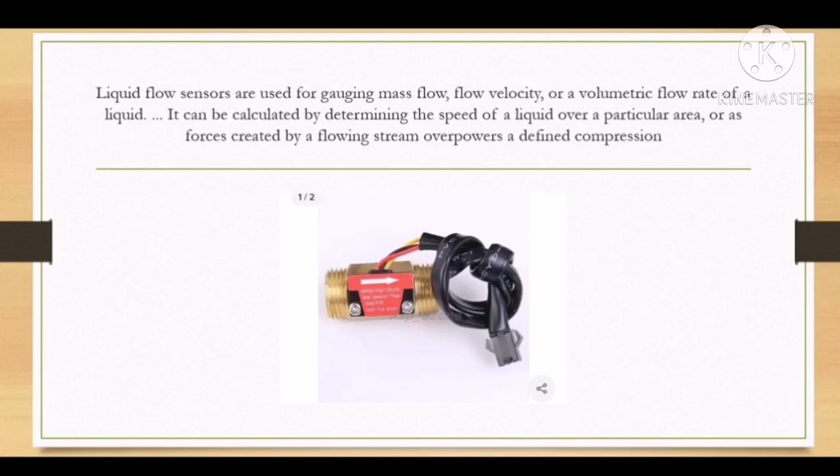This is called the serial port. For example, if you connect the Arduino with a computer, this VISA block shows the port COM, for example COM3, COM4, COM5. The velocity is 9600, which is the velocity of the Arduino.

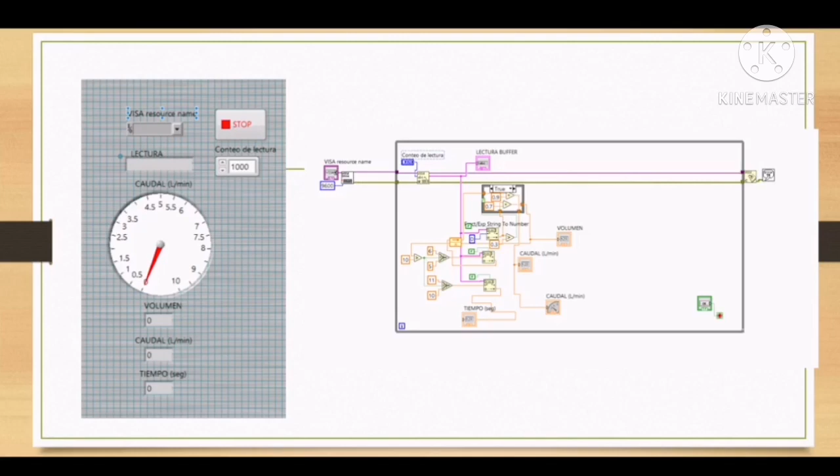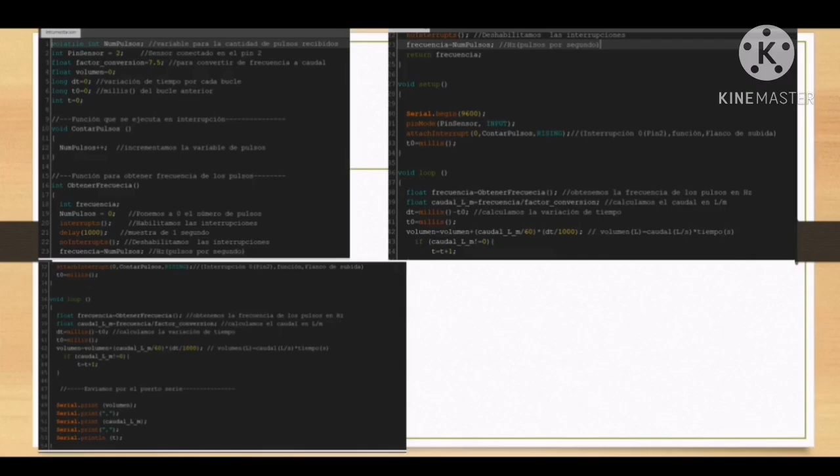Good night, my name is Iram Delgado and I am going to talk about measuring revolutions per minute. The company that designed the spraying machine used a Hall sensor as an indicator of the impeller speed. The model is A3144 and a neodymium magnet, which is very strong.

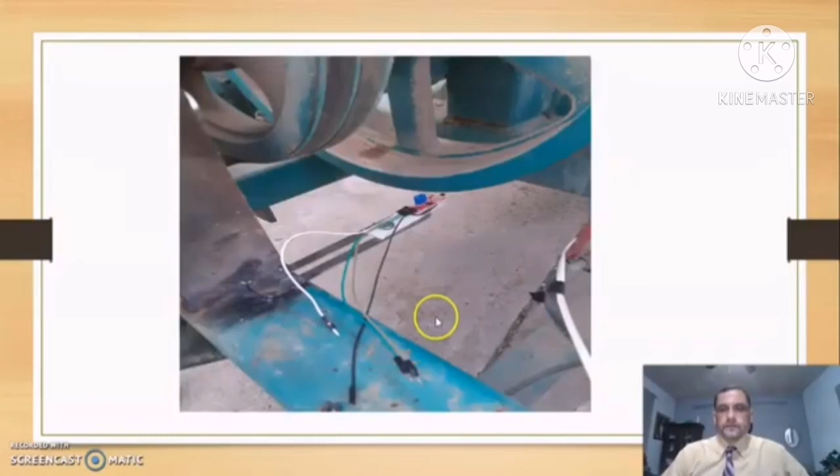The signal is obtained through a Hall type sensor, and this sensor obtains the signal from the neodymium magnet. That sensor registers the turns by means of electric impulses. In this way, we obtain pulses for each turn of the rope. We count those pulses to get the revolutions per minute.

We wrote the code in Arduino. In the part for revolutions, we declare the variable count, and the impulse increments it by one. The data is printed and sent to LabVIEW through the serial port, and there in LabVIEW we show the revolutions per minute on an indicator.

Camargo is a nut producing region. Thanks to the project, we generate benefit for the farmers who have and work the walnuts. The Technology University of Camargo has one of the most specialized careers for innovation, which is the career in mechatronics. This project consists of following up on an existing project, innovating and improving the machine with the use of technology, reducing costs and personnel work.

The company Agroindustrial San Luis gave us the opportunity to work with the project. This company manufactures agricultural machines for the field. In addition, this company supports us economically and in service, lending us a place of work and the necessary material. For this project, it took us approximately 4 months.

Interacting and working in the company workshop with the help of some teachers and company staff. Teamwork is very important for the manufacture of this project, since collaboration is needed for several tasks, in addition to having the responsibility to fulfill.

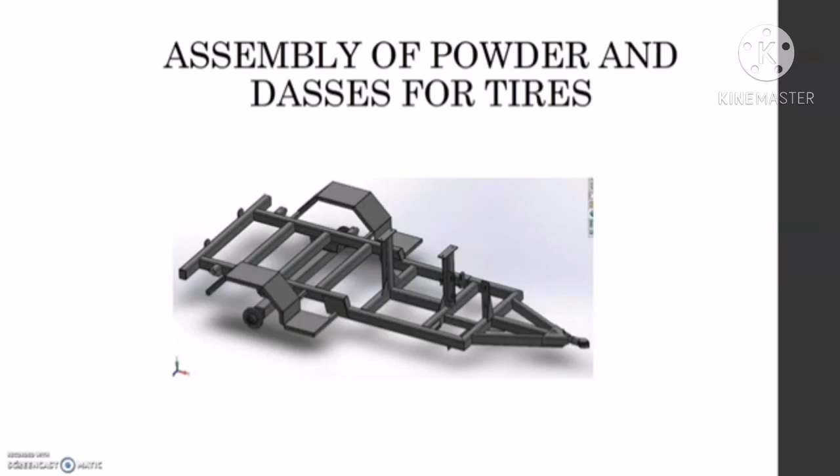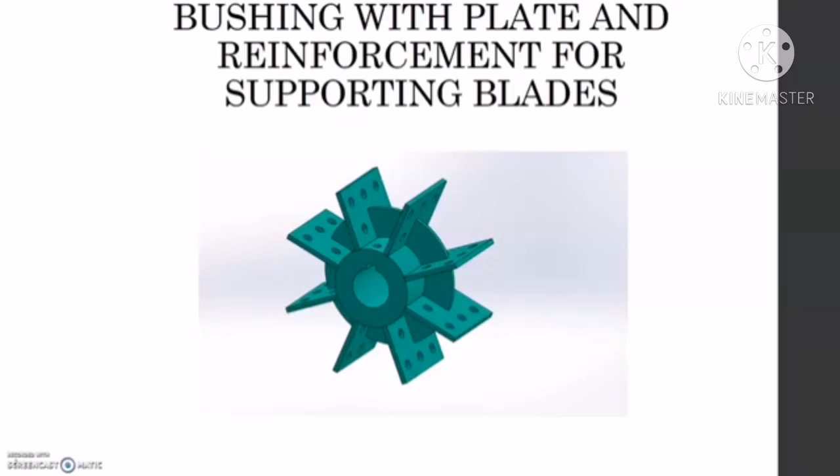This is the impeller bracket, machine weights, plate reinforced for supporting blades, and the aluminum impeller assembly to reduce weight and increase speed.

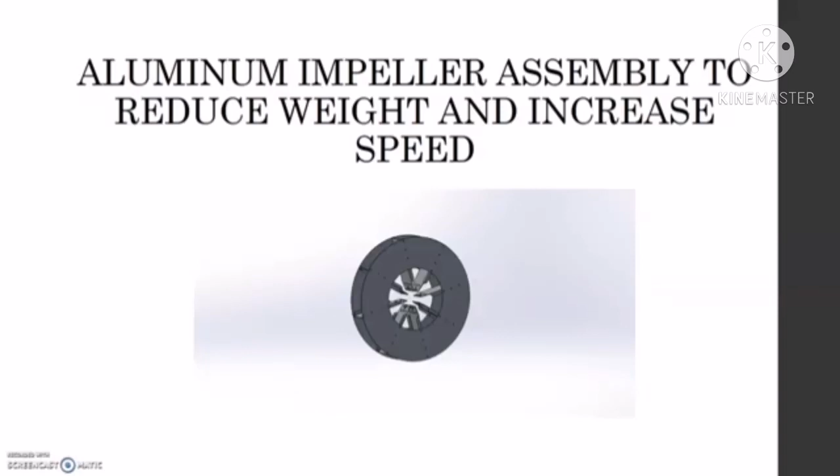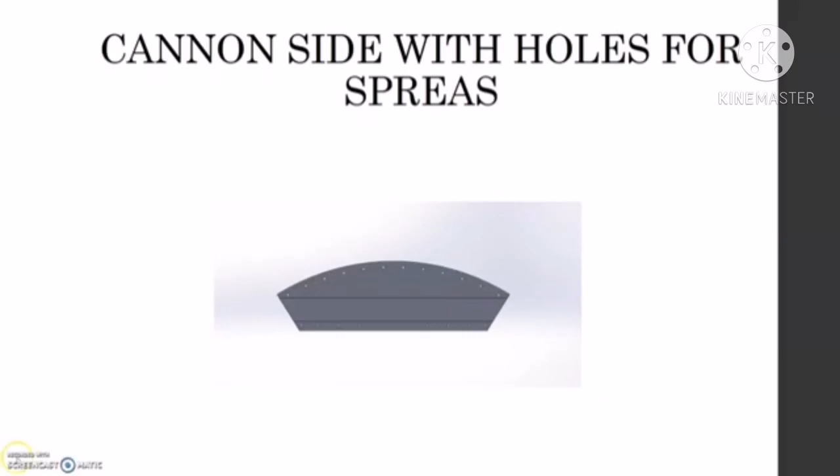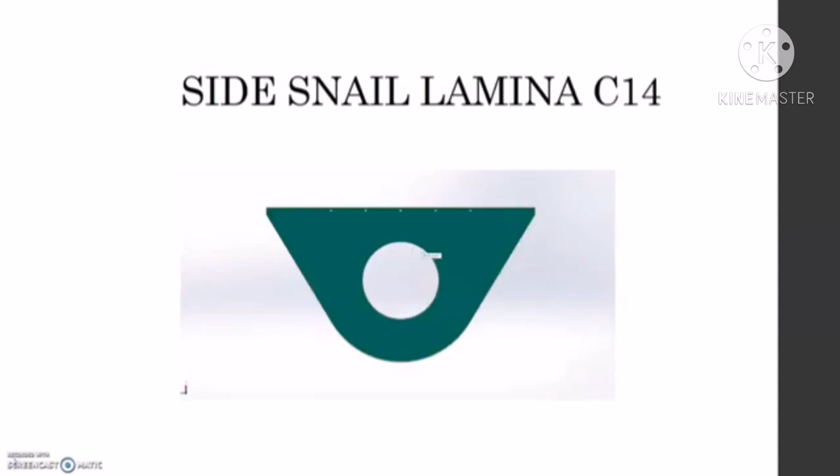This is the cannon side with holes for spreas. And this is the layout, side, rear, front, and the side snail lamina C14.

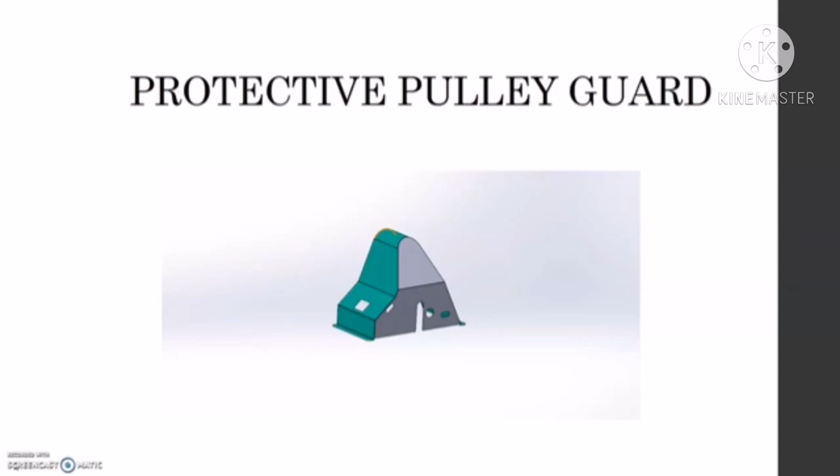This is the assembly of the spray cannon. This is the layout, protective pulley guard. This is the tank with a capacity of 1,875 liters.

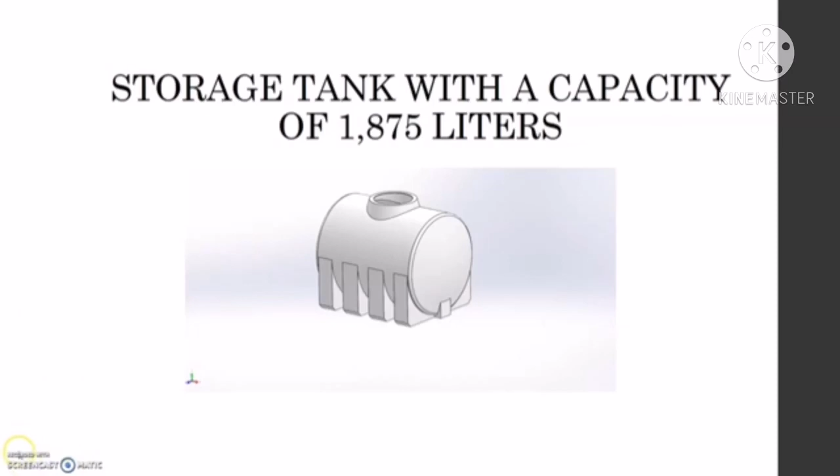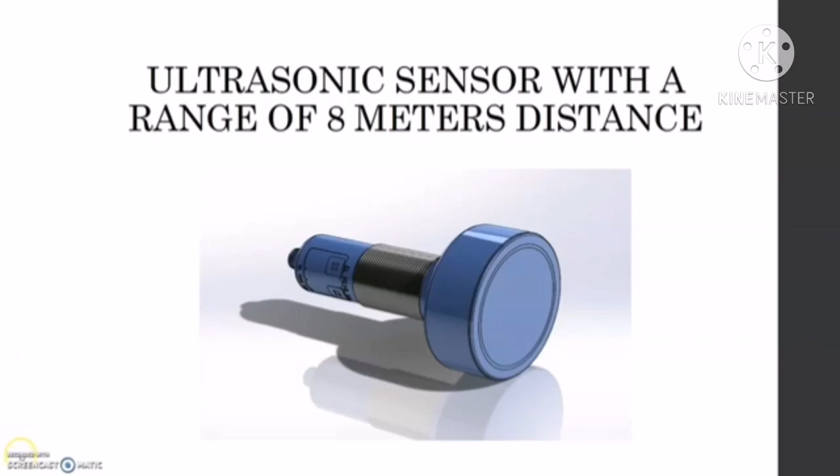This is the ultrasonic sensor with a range of 8 meters distance, and the sensor base for AE63.

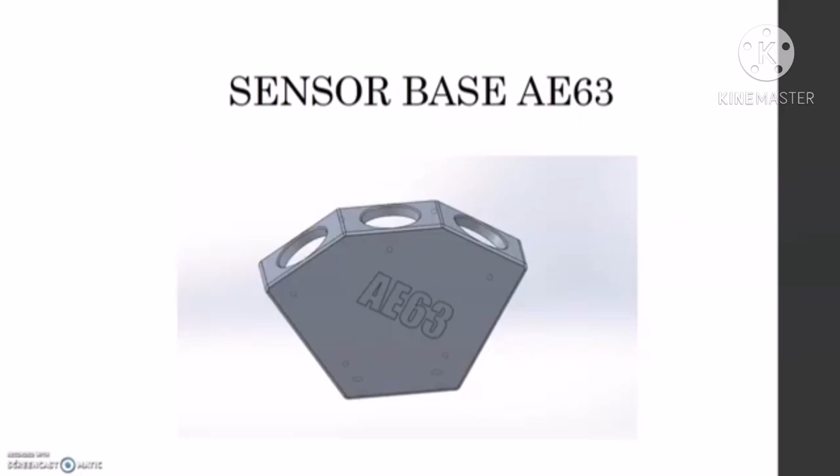This is assembled on the barrel and stored in the chassis bunker. Final design prototype: the sprinkler.